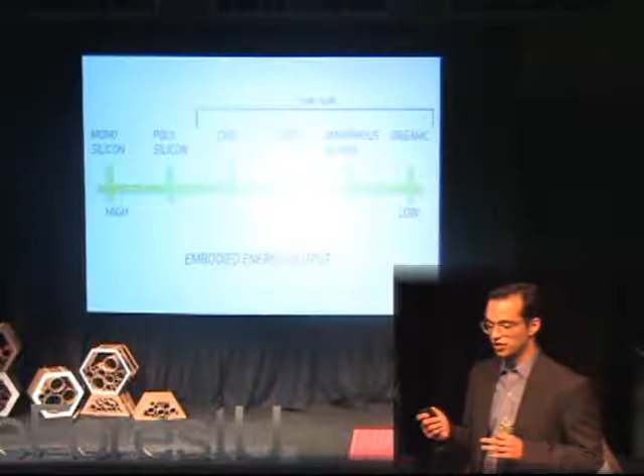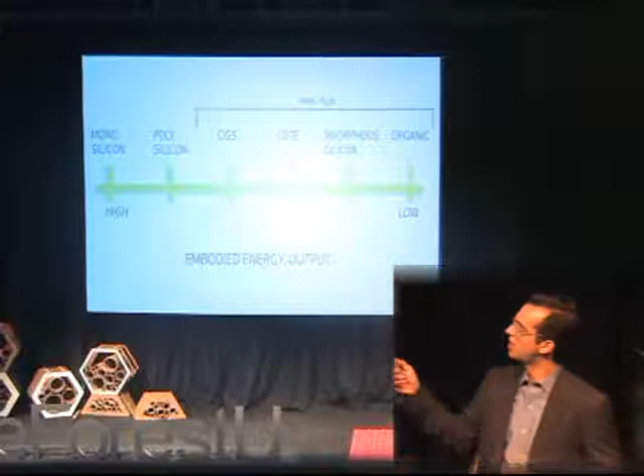I'm going to talk a little bit about technology. So when thinking about the sun and technology, we typically think about a solar panel. Today, solar panels are often used in configurations like these. We look at technology from a number of standpoints. These are the basic embodied energy in various solar technologies. On the far left, you see mono and polycrystalline panels. And then on the right, you see thin film panels all the way to organic.

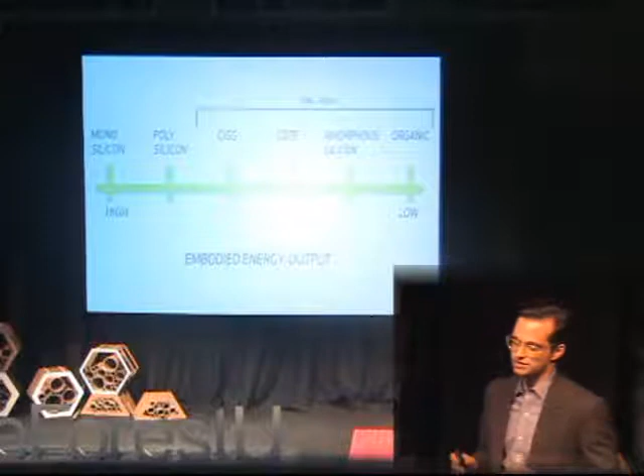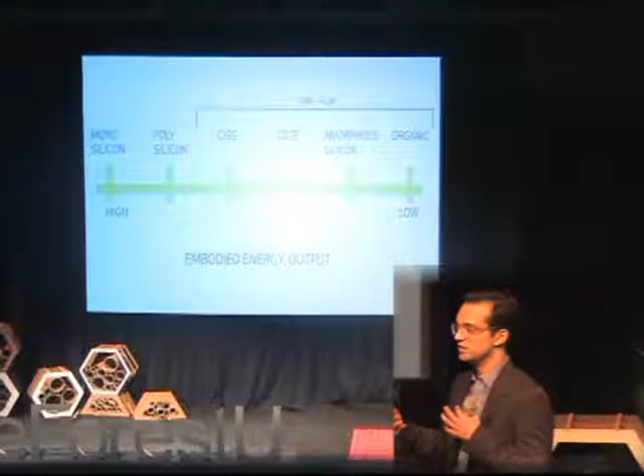So this is a graph of the embodied energy to make the material, and then also its output. So mono and polycrystalline are the best producing photovoltaic panels, while organic is a lower producing panel, but it has the ability to be manufactured with a very low energy cost. So we don't have to extract silica and basically create silicon ingots that then get cut and put into a photovoltaic embodiment. We can actually take organic material that is photoreactive, extrude it onto a plastic substrate, and have it be completely recyclable without any toxins in it.

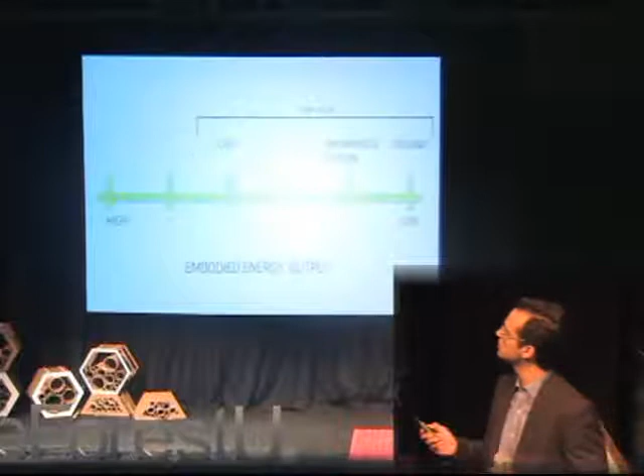This was actually funded by NCIIA, which is one of the sponsors of this event. And in that time when we were funded, we had this idea, and we wanted to create a proof of concept. So we were able to create that proof of concept, patent it, and in that time also develop a system so that we could manufacture a version of this today.

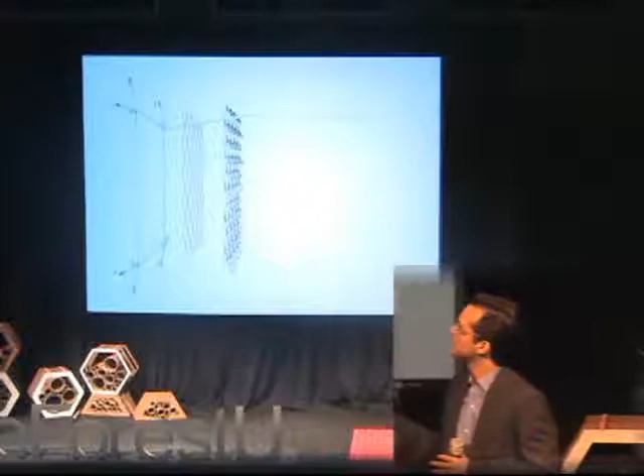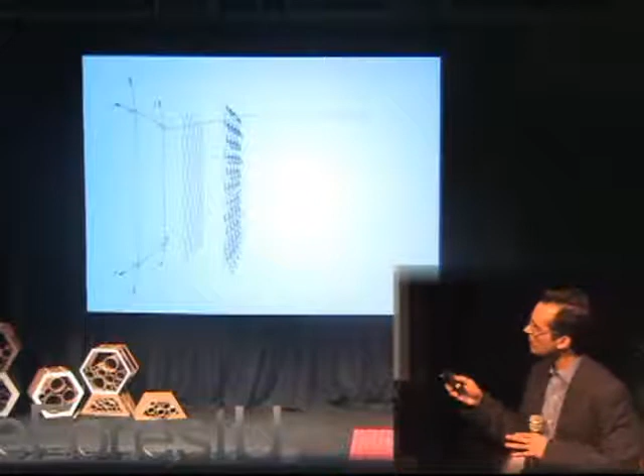And Solar Ivy is a system of components that allows for us to be very versatile in how we interact with our space. So we have an element that attaches to buildings, and we can attach to existing buildings or new construction, a stainless steel mesh that then works to span that large area of a building, and then our photovoltaic materials live on top of that. So this becomes a module that can live with the advancements of solar technology.

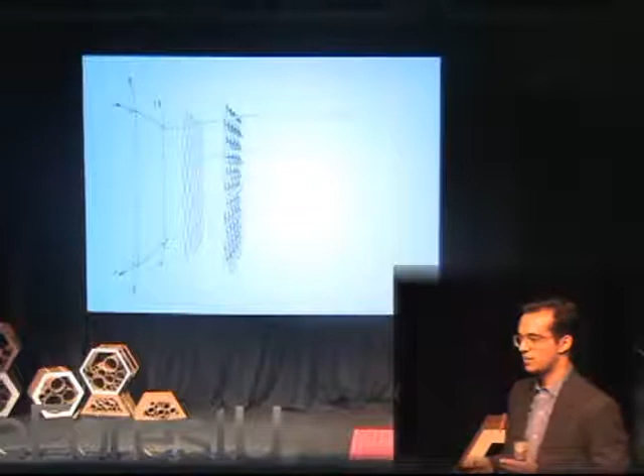So as technology advances and as these panels reach the end of their lifespan, we can replace them with the newest technology, which, given the lifespan of a typical photovoltaic, could be 5 to 10 years out or 20 years out, in which case the new technology that would be applied to this would have a much higher power density.

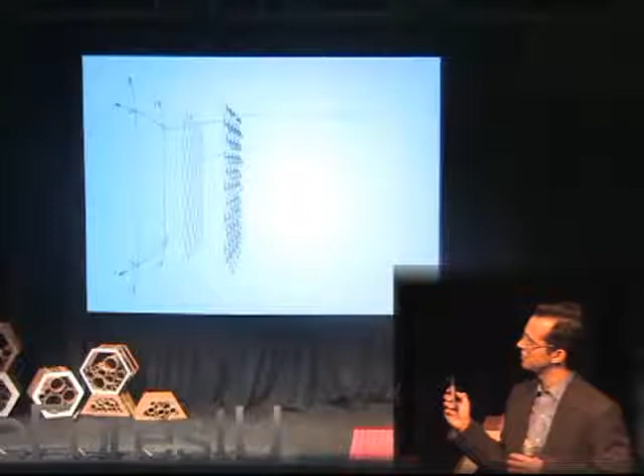When looking at this, the system is defined by the rules that ivy has and how it interacts with our building. No building location is the same, and just one second. We're missing a slide here.

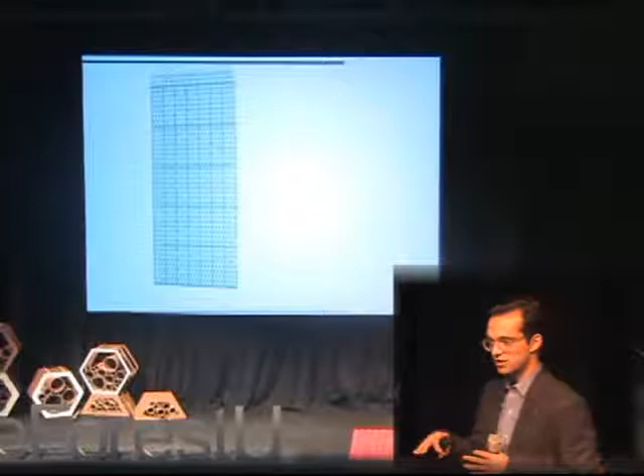Just bear with me. So we have embodied the rules of ivy into our mechanical systems so that they can react, they can orient themselves against the surface of that building, and depending on where that building is on the earth, there's a different angle of incidence. And so each leaf has the ability to be pixelated for color and for aesthetic qualities, but also be able to angle and rotate such that it's able to be at a normal for that given solar angle

of that building's location. So here you're seeing a cycle through a software that we use to program Solar Ivy across the surface of a building. We then attach a genetic algorithm to this so that we can take analysis from that surface and have a genetic algorithm basically populate species, and I'll talk a little bit more about that with another software video.

So with this, we're able to work with varying densities of a building to have the program of the building stay intact. So if you're covering a curtain wall where you have a glass view through a building, we can have varying densities so you maintain that view, and then have higher densities where the available light might be much higher. And this works on a residential scale, on a commercial scale. To give you a sense of power output, this is a 4 kilowatt system. This is an 8 kilowatt system.

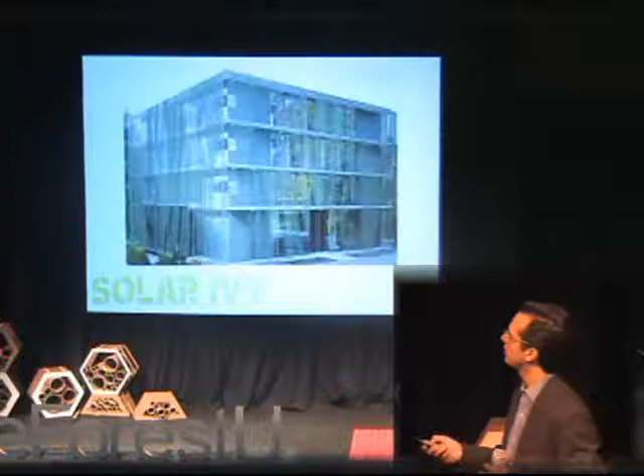Just one second. Okay.

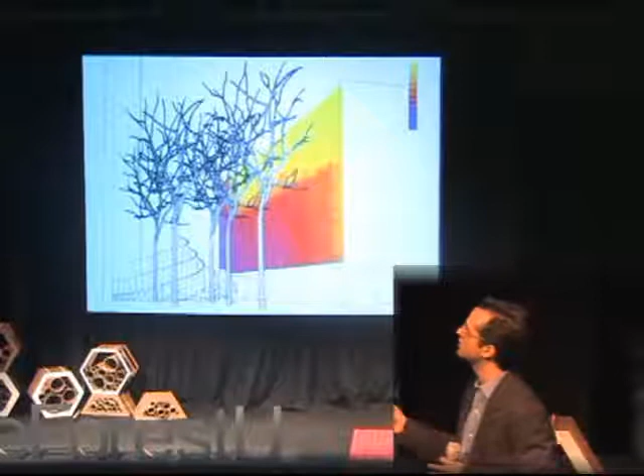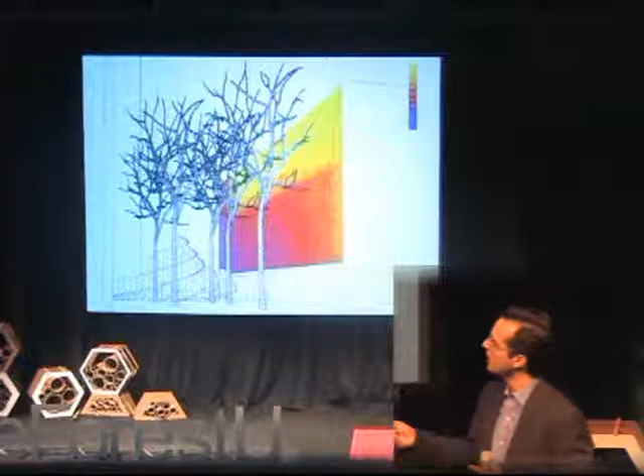So here I'm going to talk a little bit about how we can really utilize that genetic algorithm to react to a building's location. So here is a project that we did with HOK Architecture. They're a worldwide firm, and they were looking at, this is a garden that's at a hospital where they're going to have a healing garden, and this is going to be really for patients to spend time and just recover. So they were looking at having this wall covered in solar ivy.

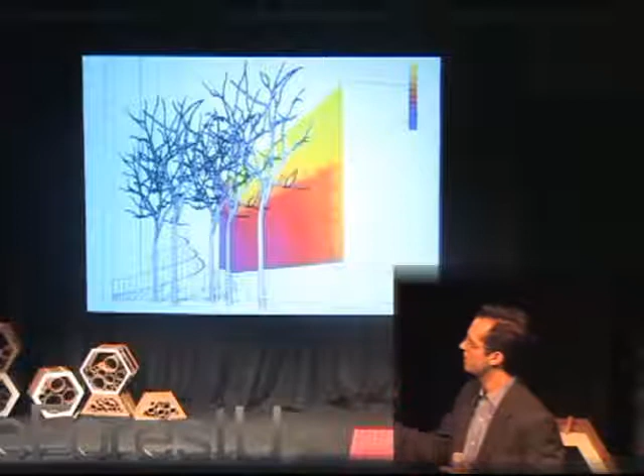And so we went through an analysis to understand what was surrounding that wall, ran the analysis through our software, and then our genetic algorithm arrived at this solution. So we have the possible solutions within our rules that were defined by ivy and some design constraints that were derived from ivy. And then we literally are discovering the solutions. We aren't designing them essentially, we're discovering them through this genetic algorithm.

So I'm going to talk a little bit about our newer product that we just launched this year that comes again from the same foundational elements. So this is thin film solar. Now we're getting into another biomimetic material, which is tensile architecture, which were derived from tensile forms in nature, which are spider webs and things like that, and modern sail manufacturing. So tensile solar is the product that comes from those other influences with our foundational elements of design.

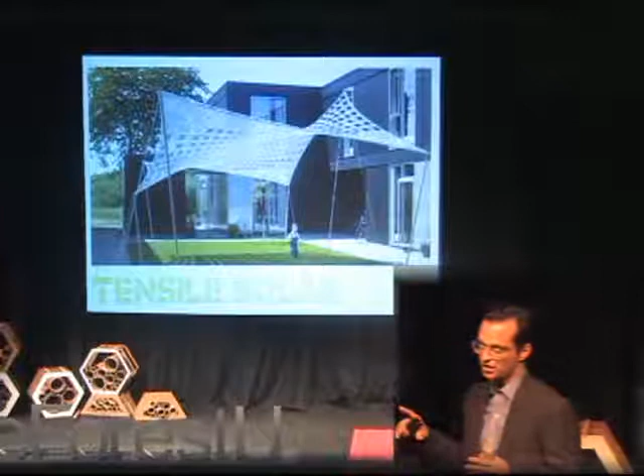Tensile solar is, again, a modular system of photovoltaic panels. They're reinforced to create a three-dimensional tensile surface, and those are defined by having compound curvature so that this membrane, this very thin material, can be static and not move when wind is on it. Kind of like that sail with the wind included. If the wind weren't there, that sail would be flapping. So in tensile architecture, you have to introduce those forces.

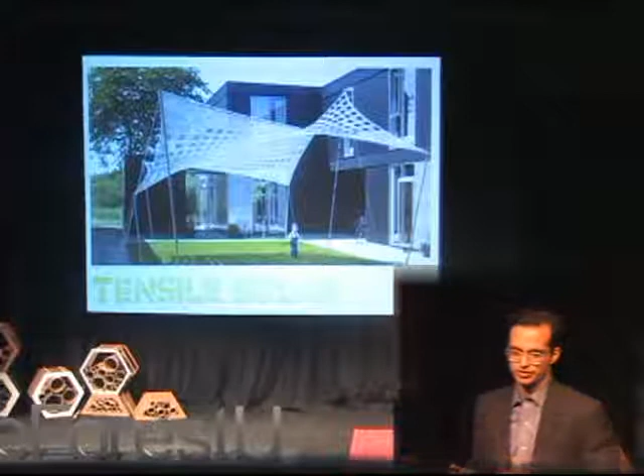One of the beauties of tensile architecture is its minimal use of material. It's typically using fabric and other membranes. So we're able to do this, again, with a software that allows for us to have many options available in it. We can cycle through different types of photovoltaic materials. So we're going through organic panels, amorphous silicon, and CIGS again. And you'll see that the form of this tensile object is not changing.

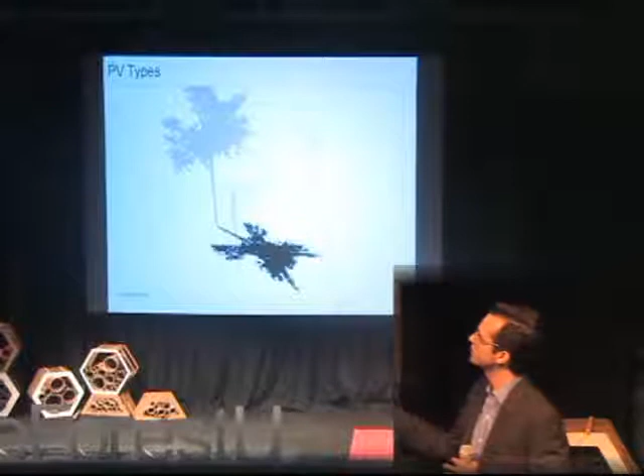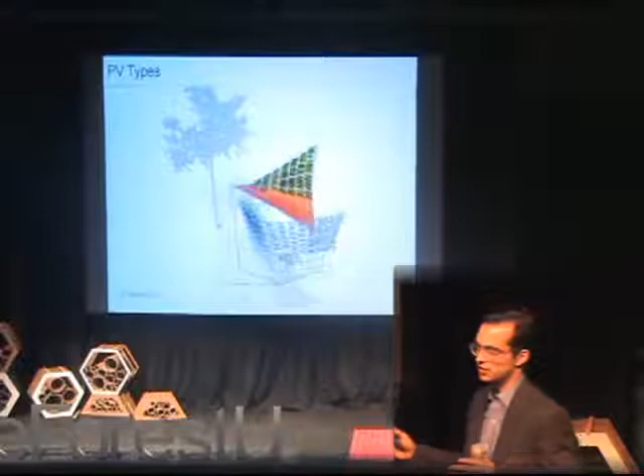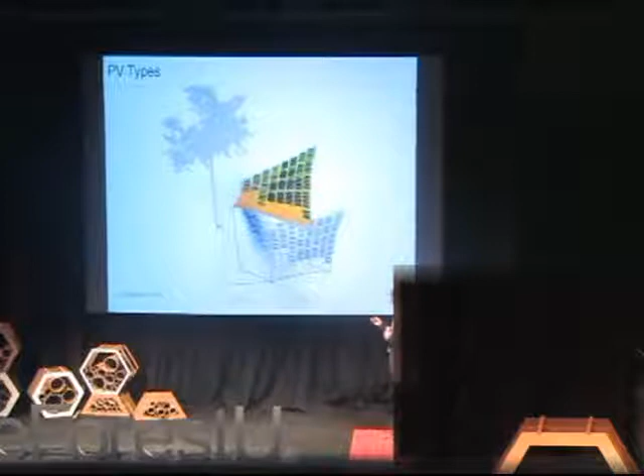When we go and, again, attach our genetic algorithm to this, we run an analysis of the site, and this is a localized constraint, so this could be a tree, it could be a building. We gather the shadows that would happen from that, and that gives us an analysis for that surface. We then create a generation of individuals that are possible solutions within the design constraints for that surface. So here we've allowed for 2 of these points to move, here and here, and these points to move up and down.

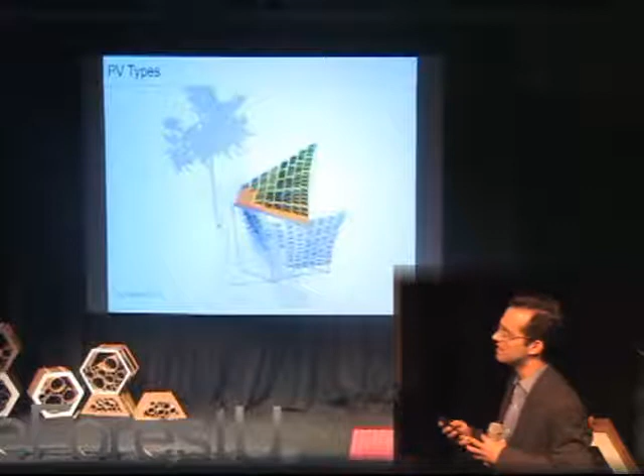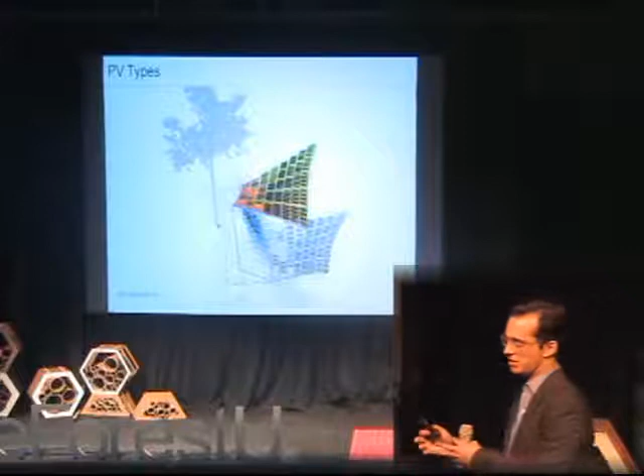Now we are literally letting our genetic algorithm find the best solution for us. It's doing the kind of heavy lifting. We're able to take the best individuals from that first generation after our analysis, breed them, and then their offspring become the next generation. We then analyze that generation and are able to, again, breed those and come to the next. We continue to do that until the change is minimal and we found the optimal solution.

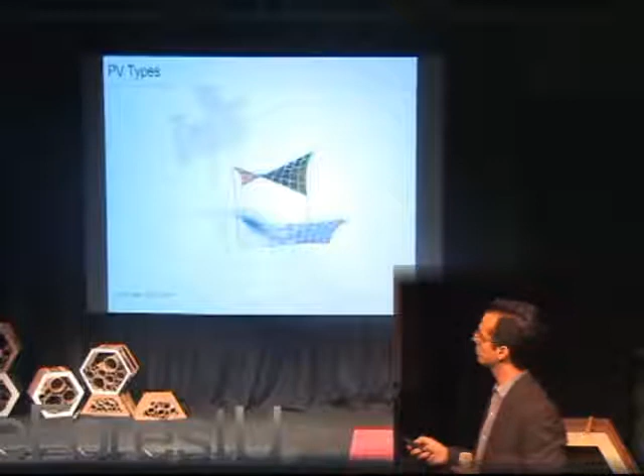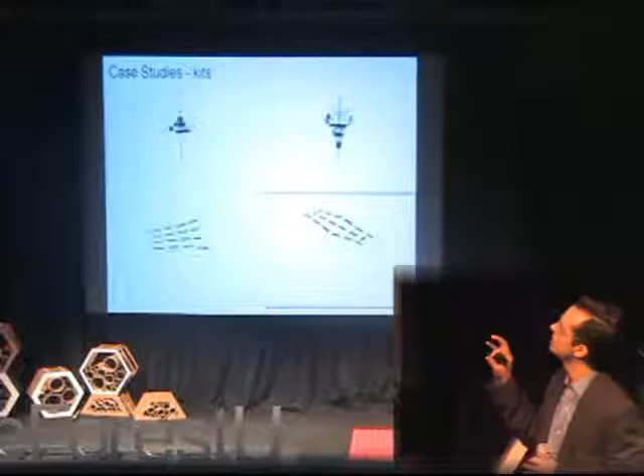So again, this has many applications within our world, from point-supported umbrella-like shapes to carports, much larger structures where we are attaching these different tensile objects together to create much larger parking structures, and even in large tent enclosures. And you're seeing the versatility of our software here, where we're able to change some of the bounds, change the size of our solar panels, and have many different possible applications for these objects. So really what we're doing is we're trying to transform our relationship to energy, our environment, and have these objects be something that can really find their way to maximize the potential energy in our environment.